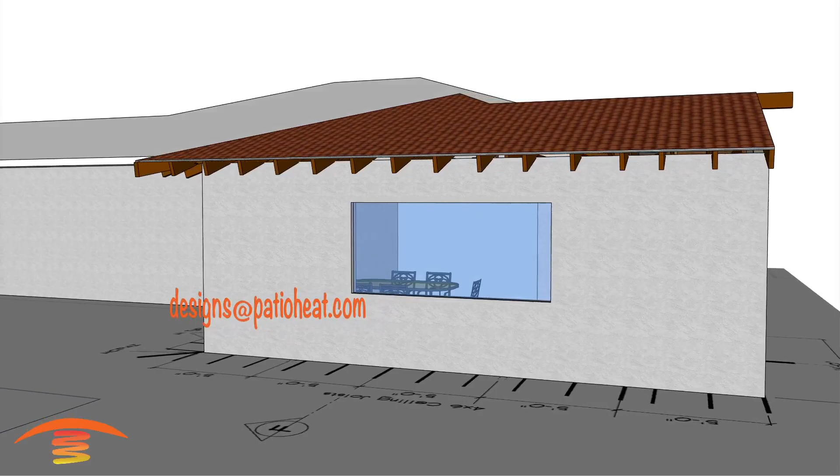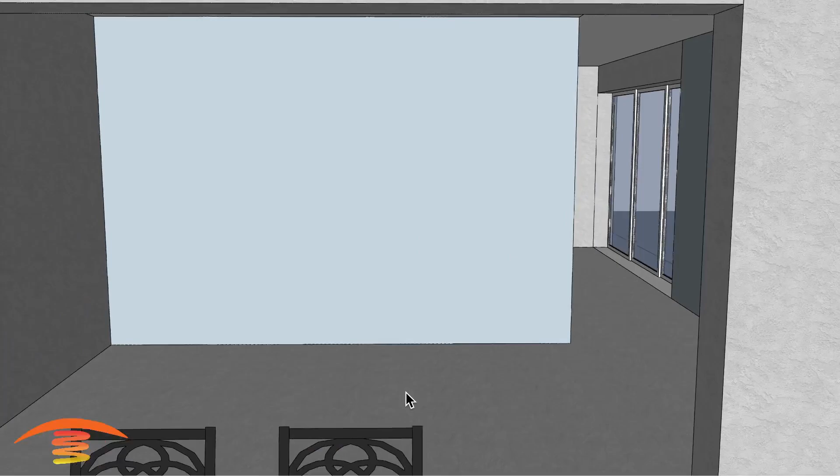Now let's get heating. All right, so here we have this residential, it's kind of an enclosed patio. So you can see we have some doors that open and close here, and we have some doors that open and close here. It also is an add-on to an existing patio that's back in here. Now, I'm not quite sure if they are interested in heating up this area over here. There is a fireplace over here, so I'm going to assume at this point that that is not the area that they're looking at. But in any case, we're going to just kind of concentrate in over here.

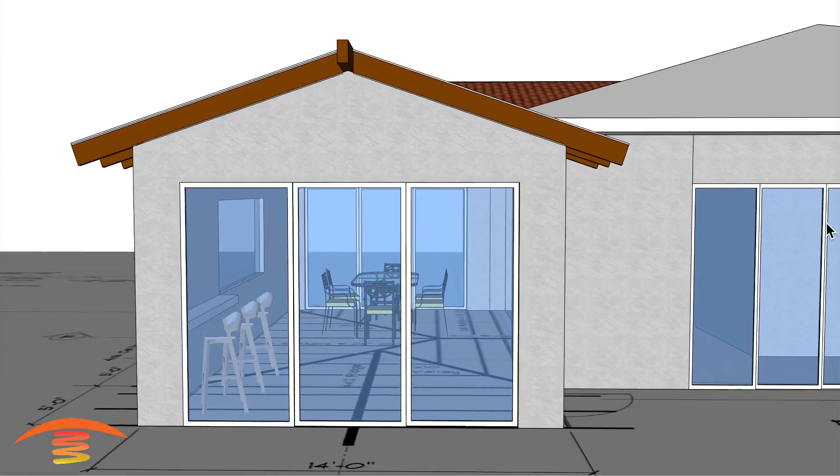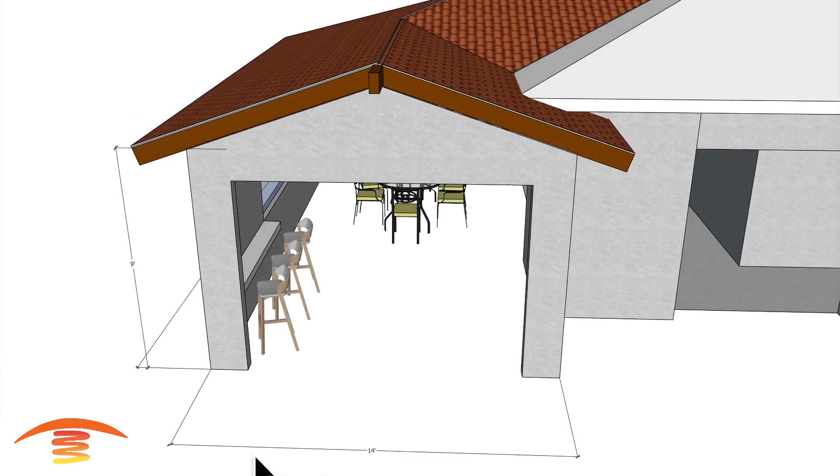Let's go ahead and look at the overall dimensions. First of all, you can see that here's the floor plan that I received, and it has some of the elevations as well. I'm going to turn off the doors and the floor plan right now, and then go ahead and look at the dimensions. So the overall dimensions, you can see here, I have at 14 feet, 25 feet this direction, and then I have a height of this top of the wall here at 9 feet off the finished floor.

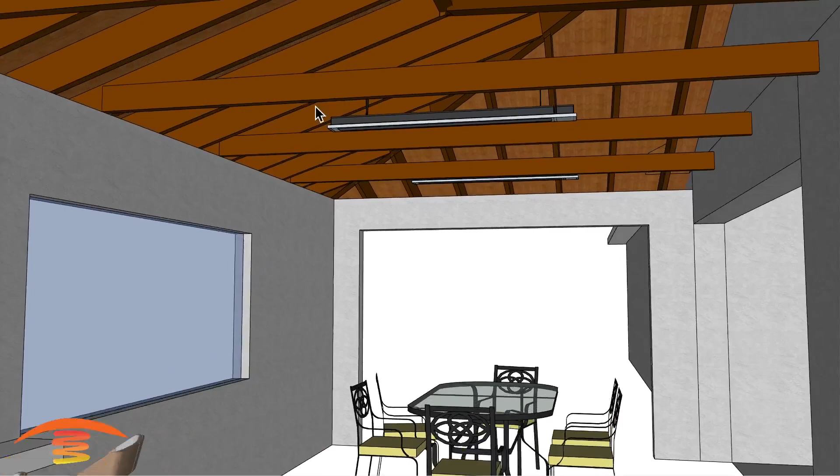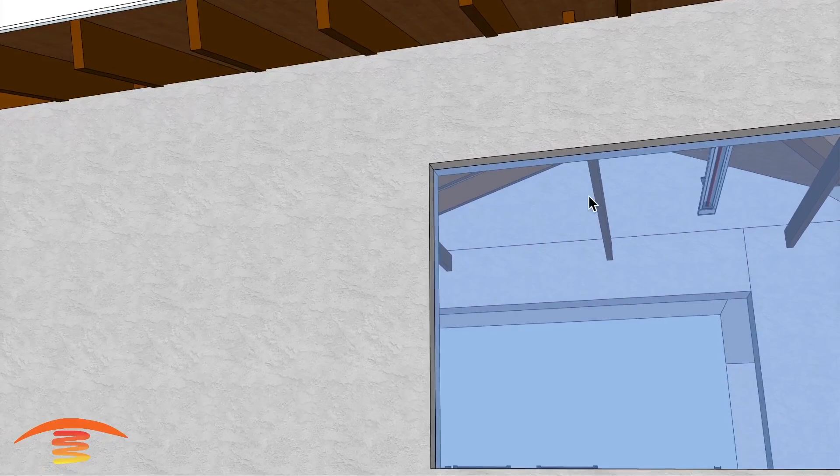You can see it's open beam ceiling up here, and there's some, I'm going to call them ceiling joists, that are going across here. I have them at 5 foot center to center, so from here to here at 5 foot, and each one is 5 foot center to center. Now, they could be offset a little bit, but what I did do is I started with a unit in the center of the overall 25 foot distance, and then I moved each unit to the left and right of it. These are Infratech slimline units, so these are 4,000 watt units.

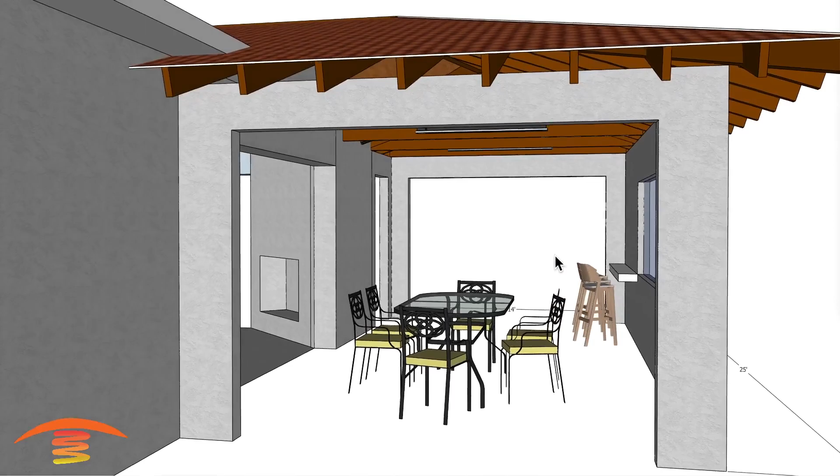Now, the reason I'm choosing a 4,000 watt unit is because this is, like I said before, an area that can be completely enclosed. And on an enclosed, very well protected patio, you're not going to need as much heat output as you would if it was completely open. And even with the doors open, we have this wall here with a window. So it's a very well protected patio from the elements. So I would go with the 4,000 watt unit.

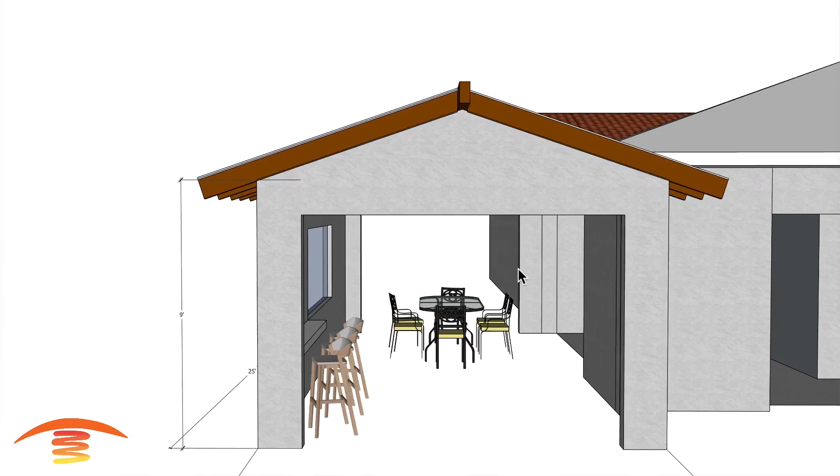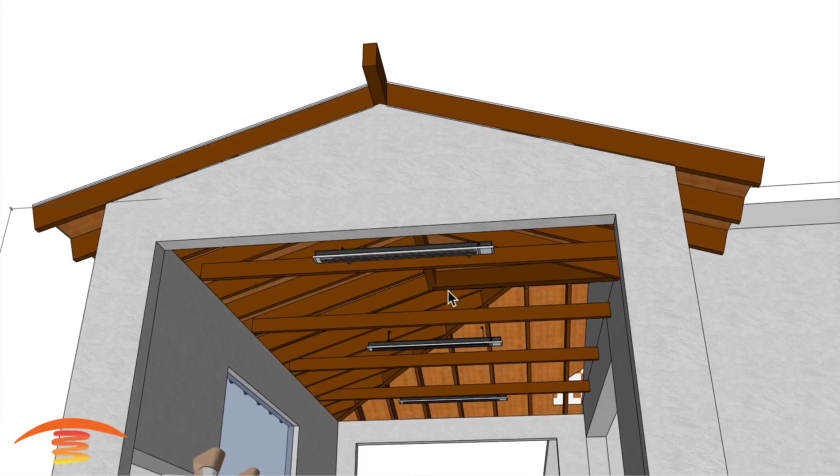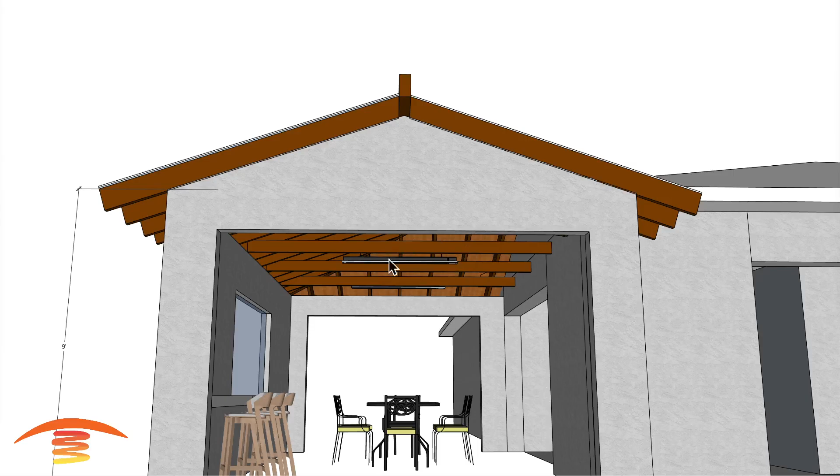Now, if you were inclined to keep this patio open during cooler months of the year where there's a lot of wind movement going through here, then you might consider a 6,000 watt unit in place of these 4,000 watt units. But you would definitely want to have a control system if that is the case. So that means you'd need to have a control box placed somewhere over here, a control switch over here somewhere, and then that wiring from the control box goes to each unit separately in order to manage that.

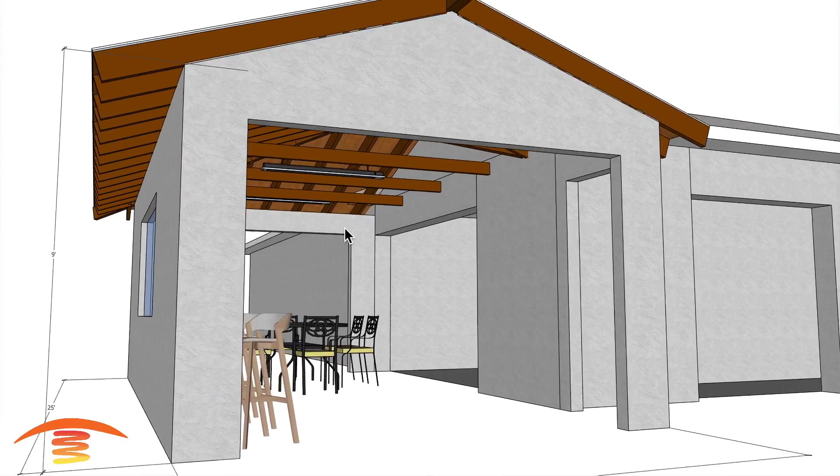But in this case here, with 4,000 watt units, you can have them on individual switches. You could turn the two on the outside on, you could turn the middle one and this front one on, or just one on, obviously. And that could very well regulate the amount of heat that you're looking for. You can slide open and close your doors so that there's less wind movement, things of that nature as well. But in any case, these are 4,000 watt units.

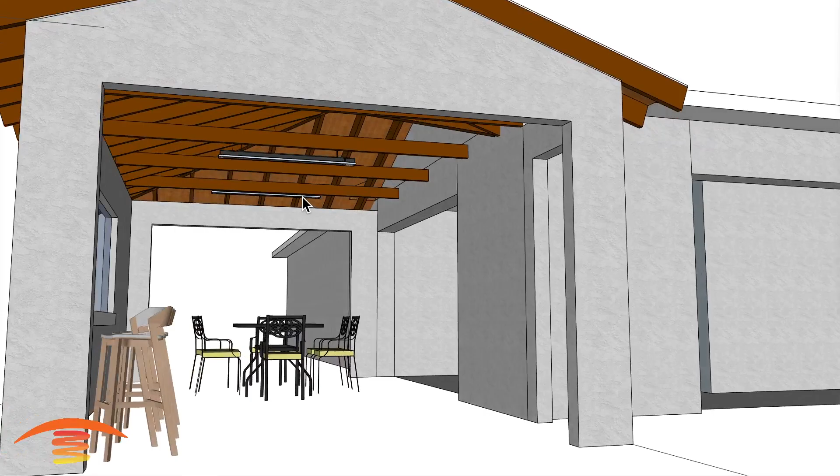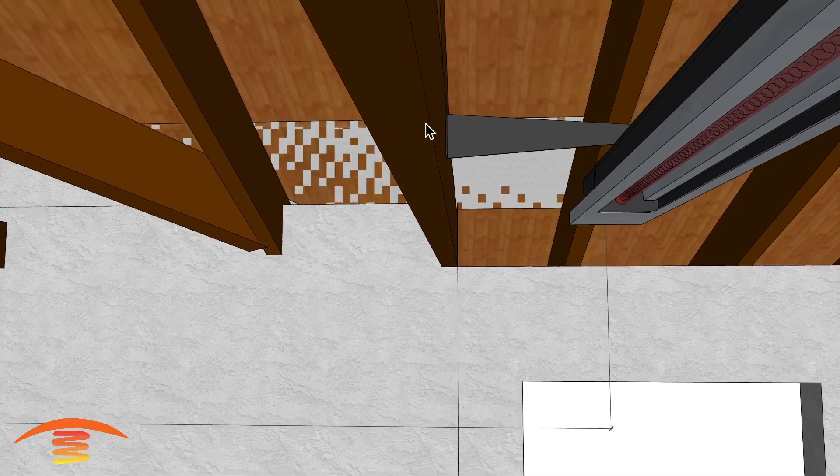Let's go ahead and look at the distances I have from each other, because these beams are coming across here. What I have is this particular heater here at 8 inches of clearance above the heater. So the bottom edge of the heater is at the same elevation as the bottom of the beam itself. And let's go ahead and look at that clearance here.

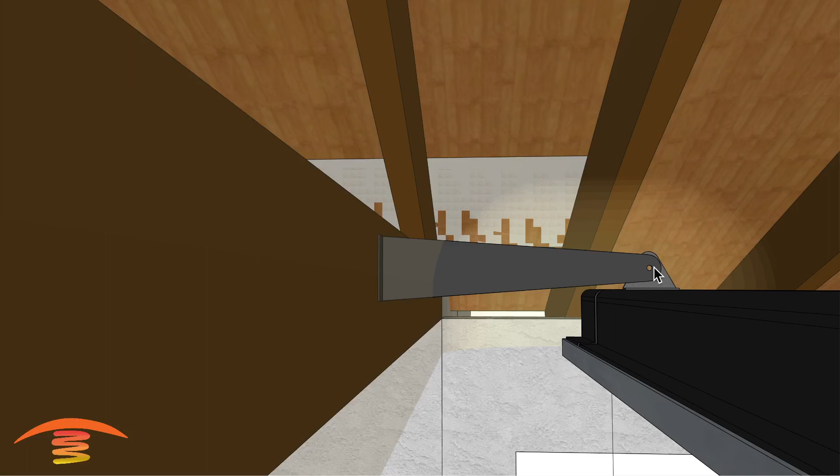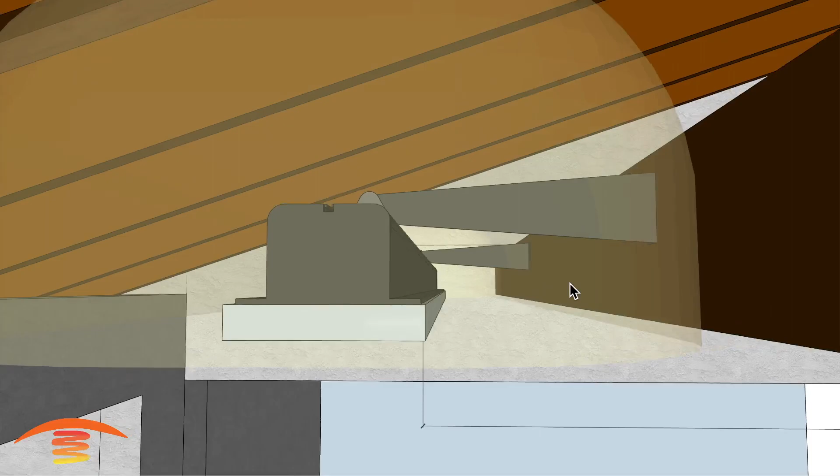So here's our clearance. We need that 6-inch clearance, and the OEM bracket that comes with the heater is only 6 inches out. So I'm putting on the extended 6-inch, which gives you a 12-inch long bracket. And you can see that with a 12-inch, you have a little bit of excess clearance, so that's fine. And the same is true over here. Let's go ahead and look at this one. Again, we need a minimum from this edge here to this edge here of 6 inches.

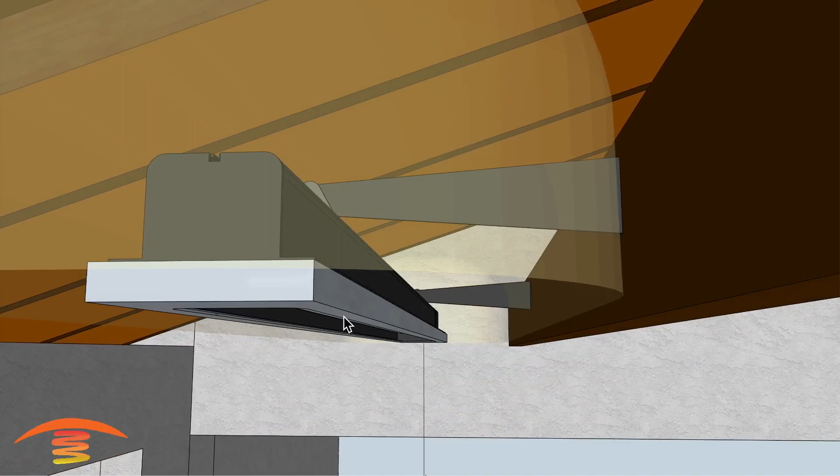And the bracket, the extended bracket that I'm recommending that you use, gives you that full clearance that you need. Now you must put the heater so that its elevation is the same elevation as the bottom of these cross beams here.

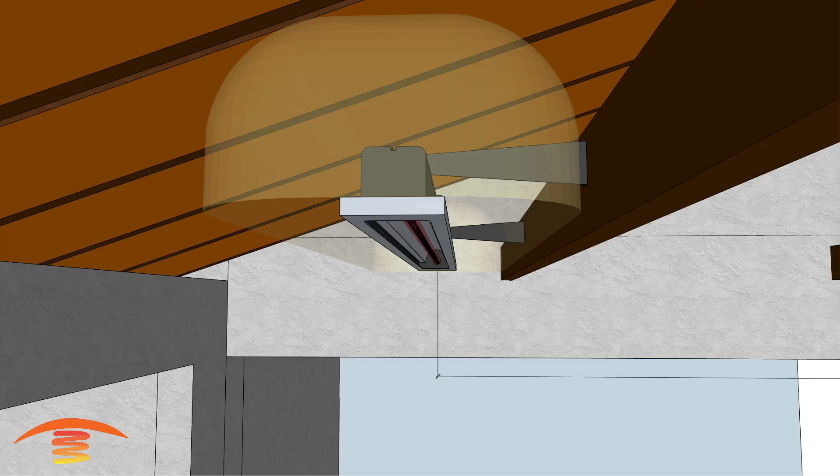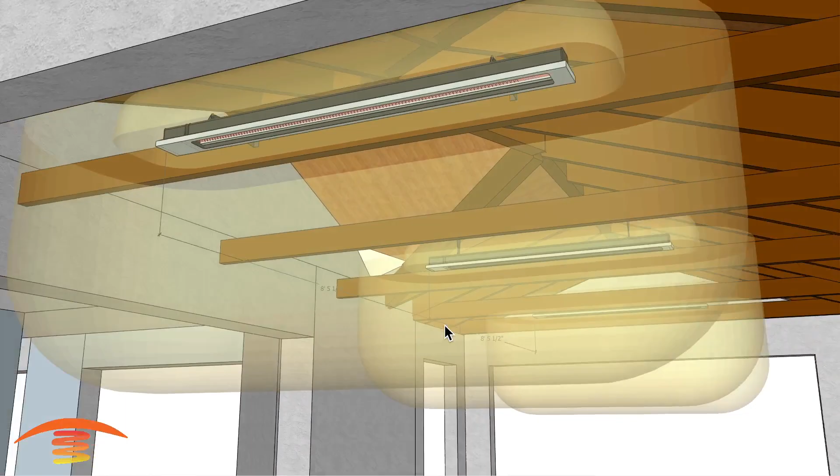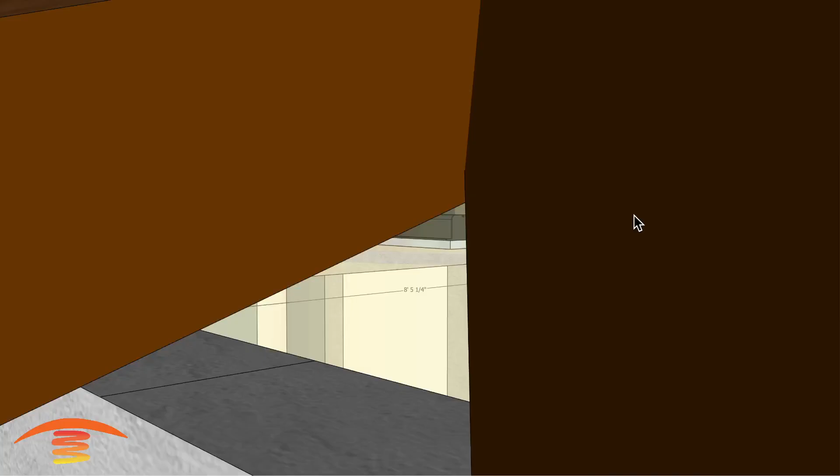The lower clearance below, you can see here, we have 18 inches to the left and right, front and back, and then 36 inches down below. So it looks like we are going to be able to meet all clearances here, even the top clearance here with these ceiling rafters coming up here. No problem at all with regards to this beam being utilized to mount the heater, and the fact that I have it at 8 foot off the finished floor.

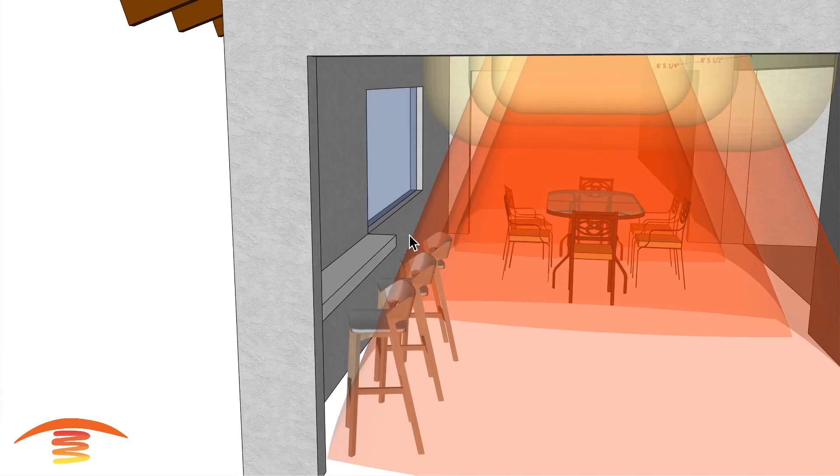So let's go ahead and look at the footprint of heat. So you can see the footprint of heat. There's a bar stool seating possibly over here. Now I'm not quite sure if this is going to be a countertop, or is it going to be just a bar section that I have here.

But you can see that you're in that ray, and with a 4,000 watt unit above you on a bar stool seating height, I would recommend a control system on that, because you're going to be way too hot if this is a bar stool seating area over here with a 4,000 watt above you.

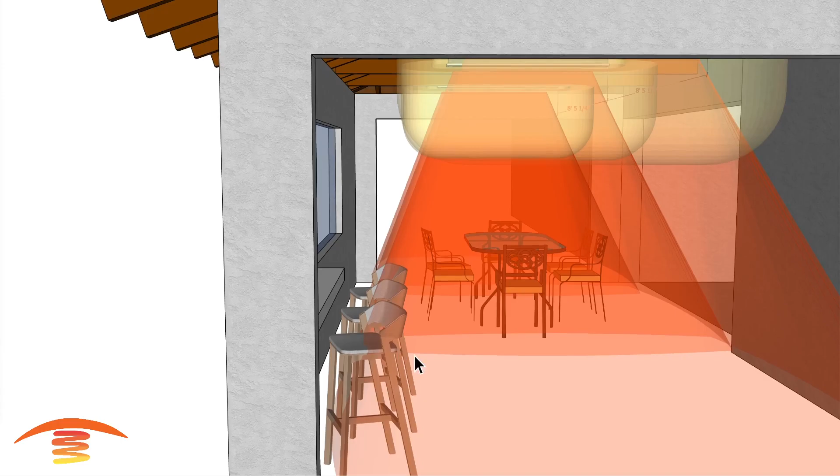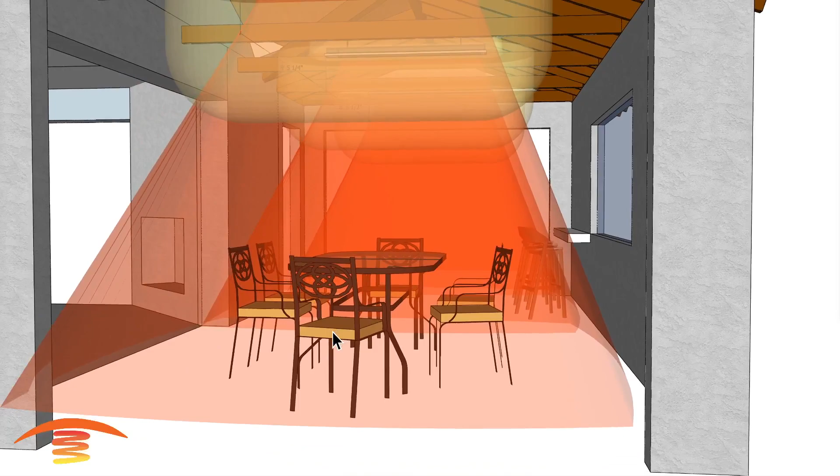Now you could just change this to 3,000 watts and then utilize this as a 4,000 and this a 4,000. But sitting roughly a foot higher than table chairs, a table, or maybe a lounge, couch, something of that nature, that extra foot higher puts you closer to the intensity of the heater, and you will feel that much more intense.

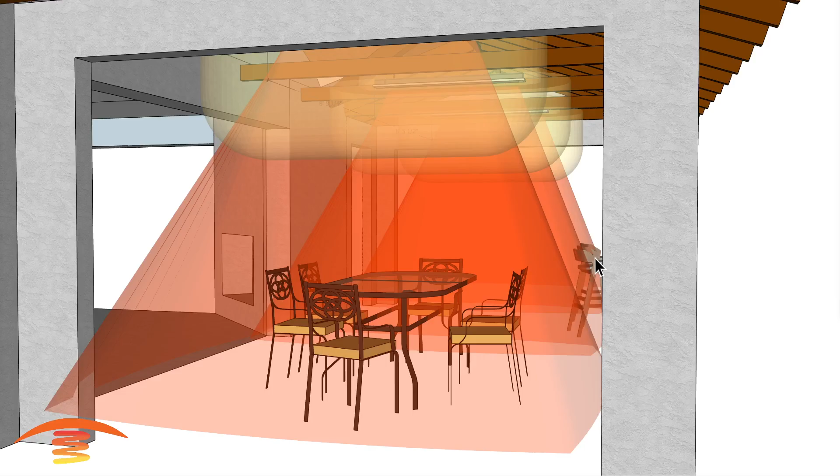So again, either a control system at least on the one, or maybe all three, and or a 3,000 watt at the end here above the bar stool seating area, and two 4,000s on this side here. But I think this is going to be a good output of heat.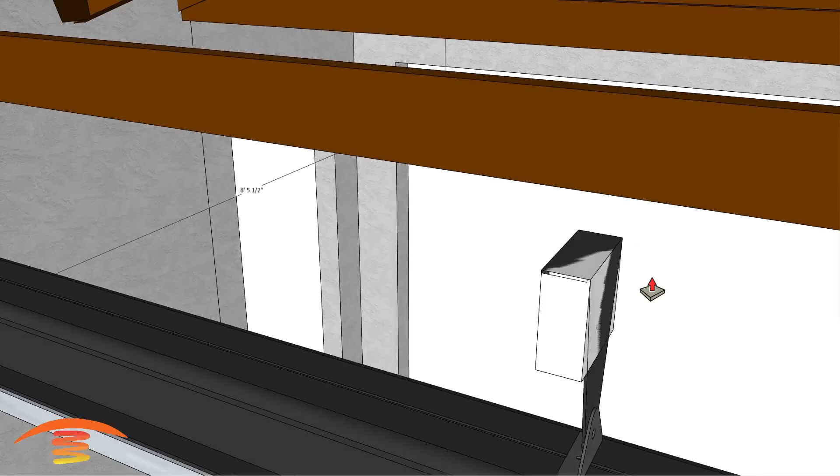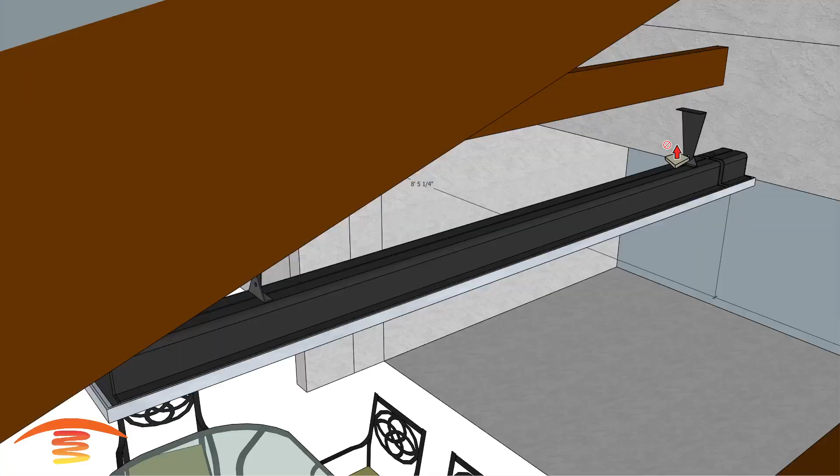The other thing I should mention over here is, let me go ahead and turn these off. You're going to have to come up with some sort of way to mount the units. Now, maybe you could just take a piece of bar steel, put it something like this, move it up so that it's at the same elevation as this. Come up with another maybe 2 inches, something of that nature, and then have that bar come across, and we'll just go all the way over to the edge here just as an example, and we'll do that over here.

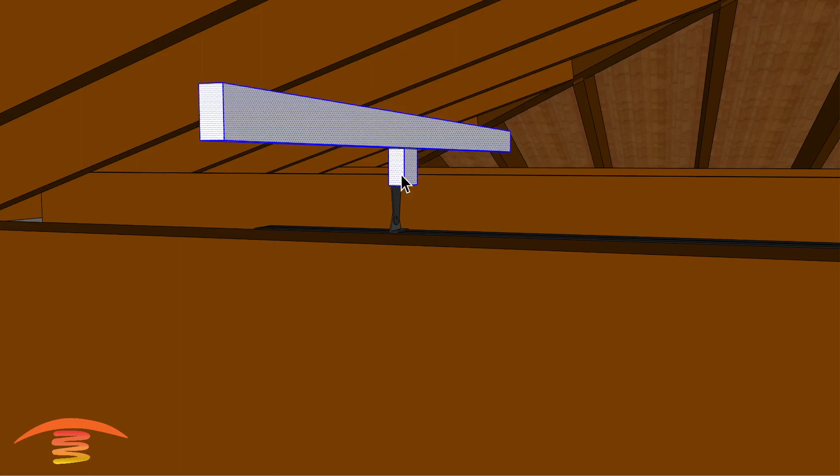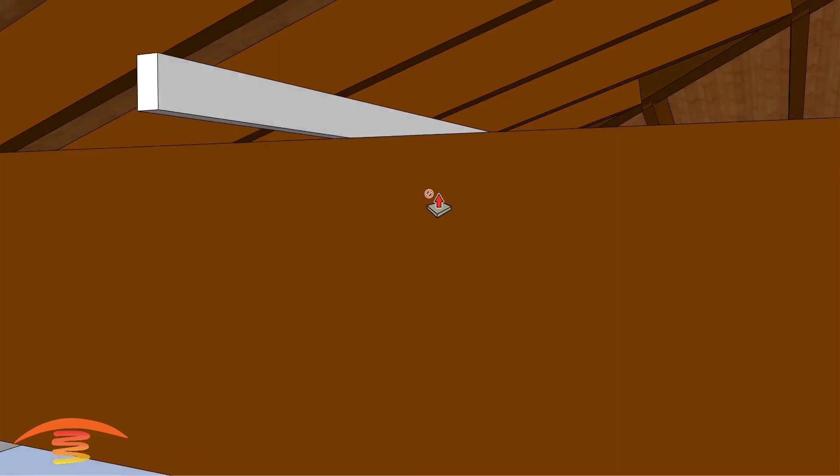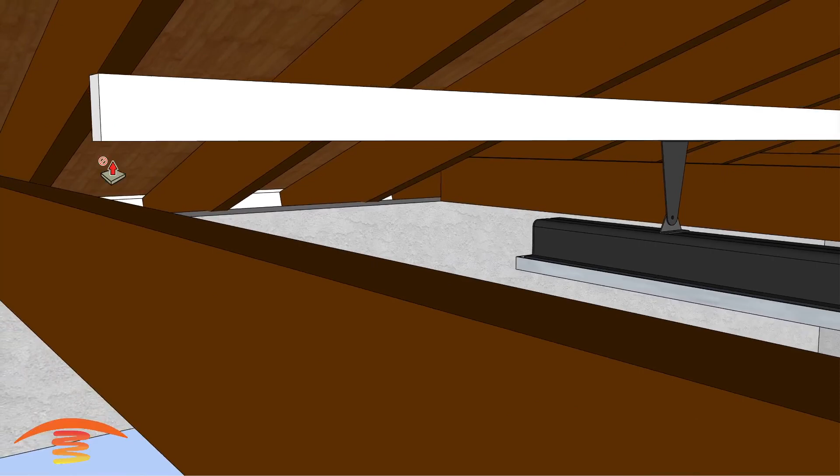You can see I'm off the top of here, so sorry about that, but in any case, you'll have to go with some sort of bracket above here. Let me see if I can change this here slightly just to give you an example. Something like this. Come over here, and then maybe put something below this to make it at the right elevation. So something you're going to have to figure out on how to accomplish this up here. But in any case, these heaters are less than 18 pounds a piece.

And then the last thing I should just mention is, if you decide you really want to have much more heat up there, you could go with maybe a 6,000 watt unit, but you've got to use a control system with it. 6,000 watt units at this elevation would be awfully hot. Let's see if I can throw one up here for you. Okay, here we go. So this would be a 6,000 watt unit.

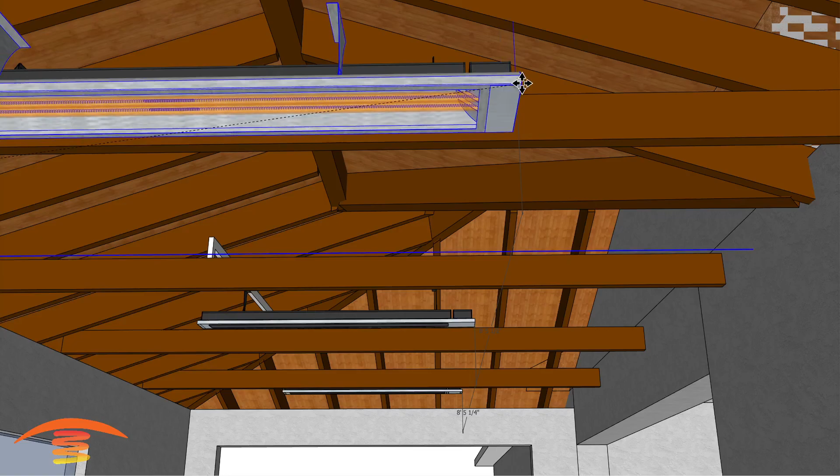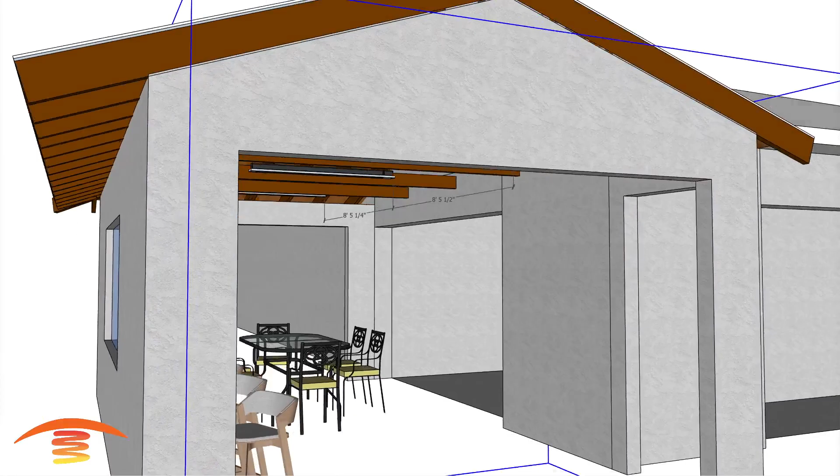And again, you need to maintain that clearance here. So I'm going to just place it here as a simple example, but it would have to have that minimum of 6 inches of clearance from the edge. It'd have to be at the same elevation, and I'm going to delete this one here for a moment and turn on the ray so you can see the footprint of heat is really designed for a 10-foot elevation height.

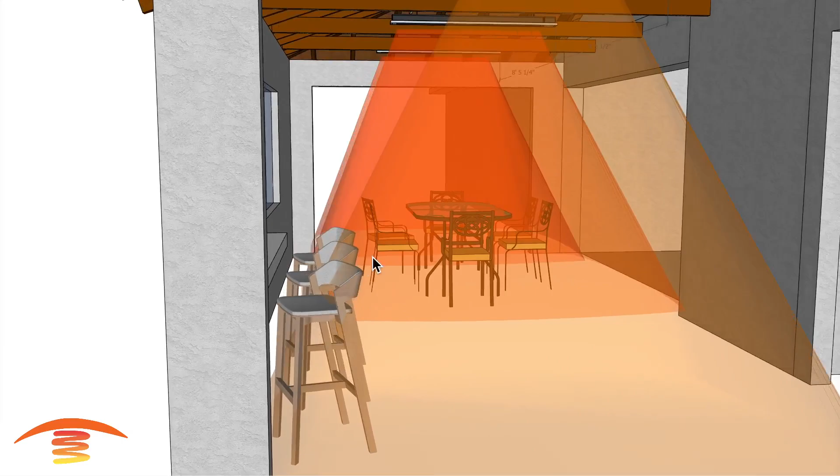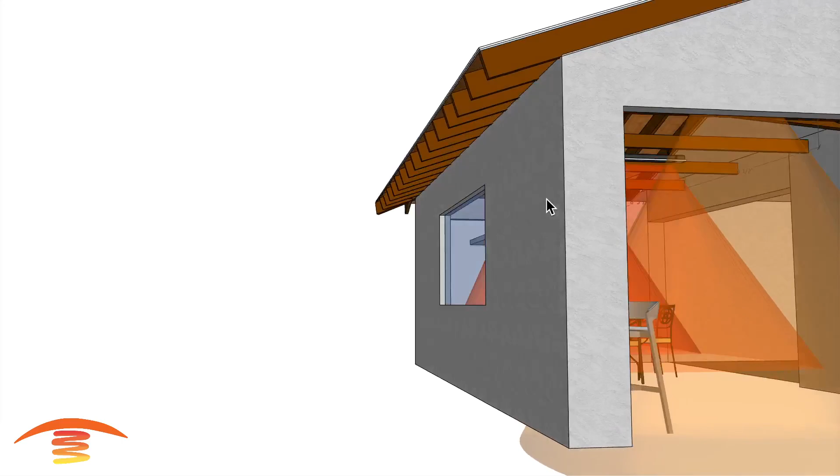From left to right here, it's about the same coverage, but it's much more intense. If you're sitting right here on a bar stool, you would be way too hot within just a few minutes of sitting underneath this heater. So again, you can use the 6,000 watt units if you put a control system in the application, but I would still stick with the 4,000 watt units. I think that would be the most beneficial for this application, especially with the fact that you can close these doors. I think that's a very good option here.